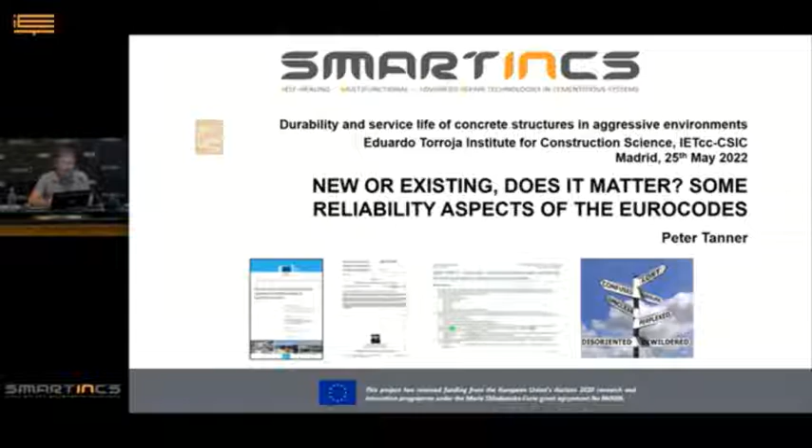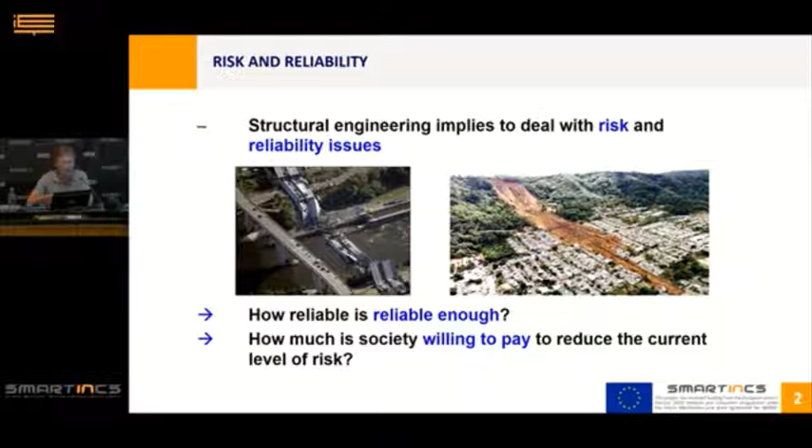In structural engineering, we always have to deal with risk and reliability issues. We do not want to produce this kind of situations, of course. And we have to answer questions like how reliable is reliable enough? How much is society willing to pay to reduce the current level of risk, etc.

Traditionally, structural engineering always has been a self-regulating field in the sense that codes and standards are produced by the engineering community. By definition, structures designed and built to code rules are considered safe and fit for use, as these two, hopefully, from our office.

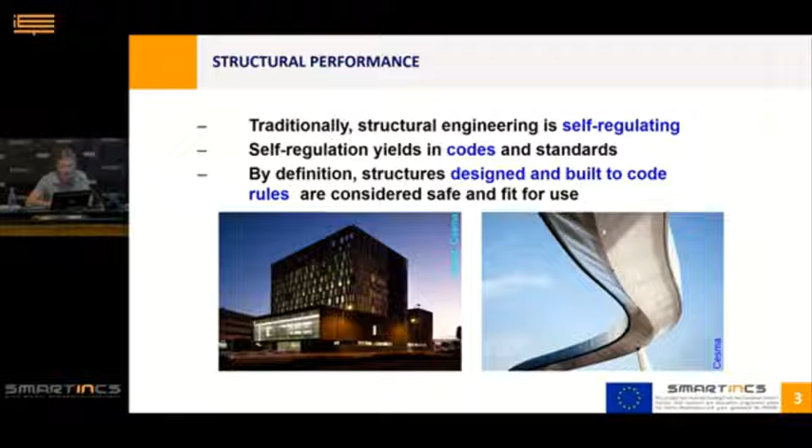Now, these codes treat the safety issues implicitly, so that risk acceptance mainly is based on past experience. And the requirements, in fact, may be insufficient, maybe they are adequate, or maybe they are too high, so that we waste available resources to reduce risks.

This picture is from a previous avian flu crisis 10 years ago, where everybody said that there was an overreaction, and maybe nowadays the requirements would be different. This also shows that the requirements may change over time.

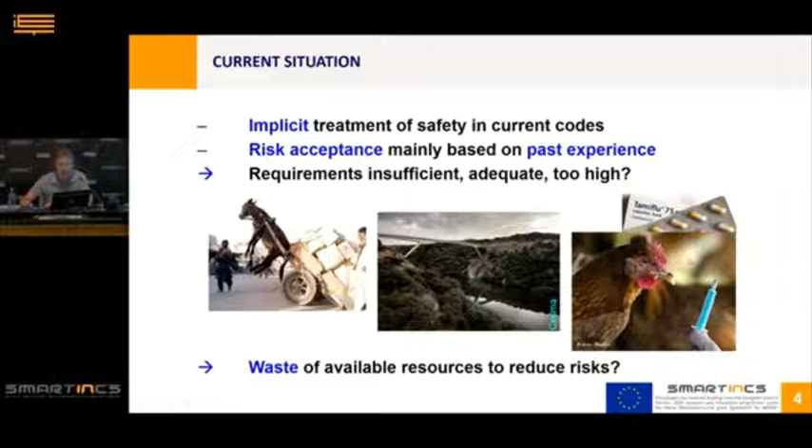If we now switch to existing structures, the need to assess the reliability of an existing structure may arise from different causes, but all of them can usually be traced back to doubts about reliability, as here, where we had to add a new roof to an existing grandstand, these typical frame structures, thus completely changing the internal forces and moments, or in this case, where we had to widen the bridge deck, thus increasing the traffic loads.

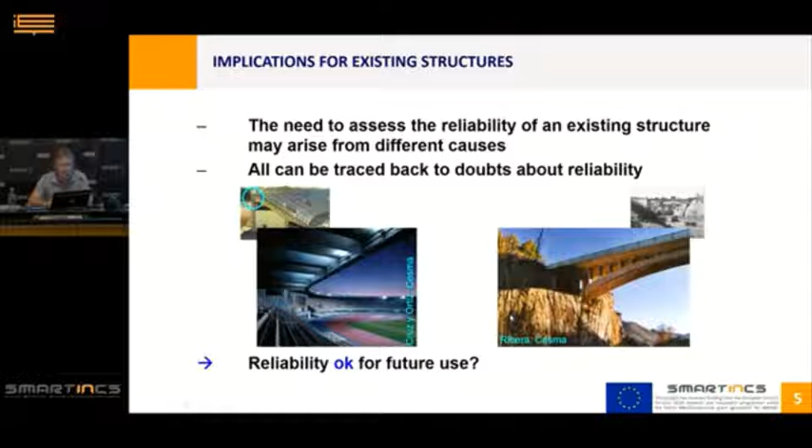We have to decide whether the reliability of these existing structures is sufficient for the future use conditions. So the fundamental problem is to find an answer to the question: is the structure reliable enough? In fact, there are only two possible answers, yes or no.

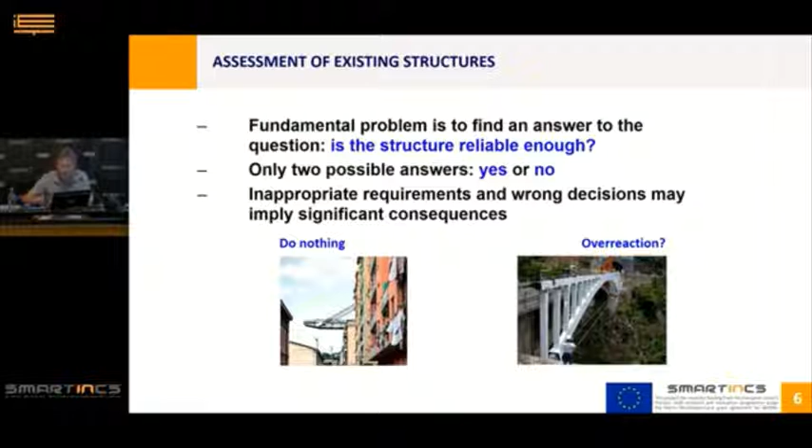But it is not as simple as that, because inappropriate requirements and wrong decisions may imply significant consequences, as well if we do nothing where we probably should do something, or if we overreact and thus waste public resources. So this is the context.

Let's now have a quick look at what we do as engineers. We take decisions under uncertainty. Then we will have a look at the main differences between assessment of existing structures and design of new structures. We will see how this topic is tackled in the Eurocodes, and we will also have a short look at needs for further development.

Many engineering problems can be described by comparing two quantities: the effects of an action on a system, like here, for example, this block, and the corresponding capacity of the system, the resistance in this case of this wire. The reliability of the system is expressed in terms of basic variables, R and E in this case, by the limit state function. The simplest limit state function is the one that compares R and E, and it is expected, of course, that R is bigger than E.

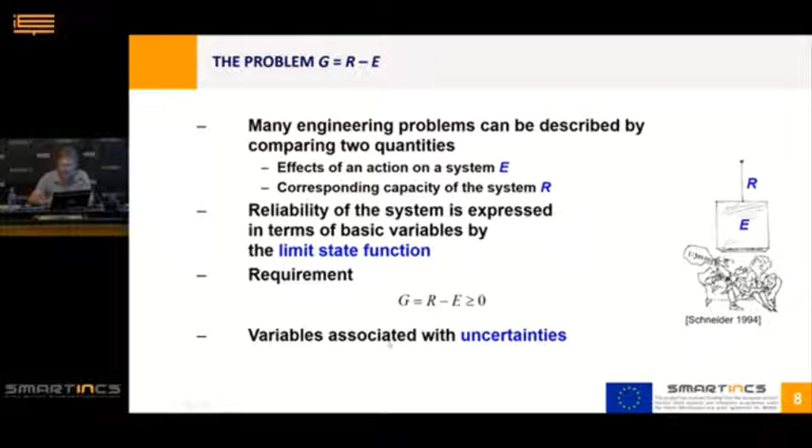Now, the problem is that the variables are associated with uncertainties. There are different types of uncertainties. First of all, the natural variability. Then statistical uncertainties due to limited data. We usually only have a few data available, particularly if we are talking about existing structures.

And there is, of course, also lack of knowledge, for example, about the future evolution of certain parameters: traffic loads, wind velocities, material strength, etc. And there is also lack of knowledge in models, because every model, even if it is a sophisticated 3D nonlinear finite element model, it is still a model. The outcome of our calculation is uncertain.

And then there is also human error, but we will not talk about that because this is supposed to be avoided by quality assurance procedures, etc. There are different possibilities to represent the uncertainties. Normally it is sufficient to represent the variables by their distribution function with a certain mean value and a certain scatter.

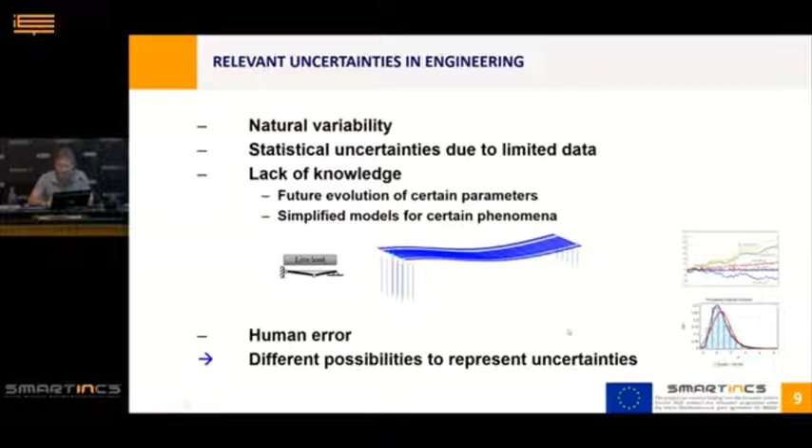On the other hand, the general principles of structural reliability are the same for design and assessment. So we may ask ourselves, why should there be a difference between assessment of existing structures and design of new structures if everything is the same? In both cases, we can verify structural reliability in terms of probabilities of failure, reliability indices, or using characteristic values and partial factors.

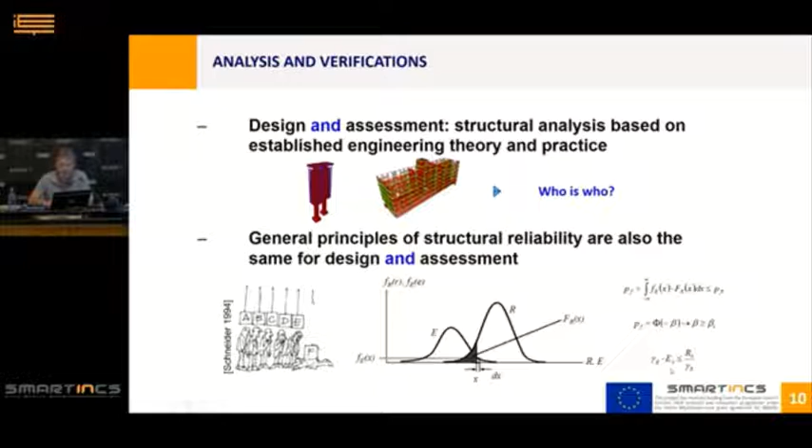Now let's see what the differences are between assessment and design. The fundamental difference is the state of information. If we design a new structure, we start with a blank sheet, and we have to assume the properties of the future structure. To do so, we have our codes, where the variables are defined. If we apply the codes correctly and the structure is properly executed according to the design, then the reliability will be more or less objective—the reliability associated with the code rules.

In existing structures, the situation is completely different. Very often we have only vague information available, or even no information, but the structure is there, so we can measure its properties and actions, etc. So the reliability will depend on the available data, and sometimes on the knowledge of the expert doing the assessment. The reliability of an existing structure is therefore more subjective than that of a new structure.

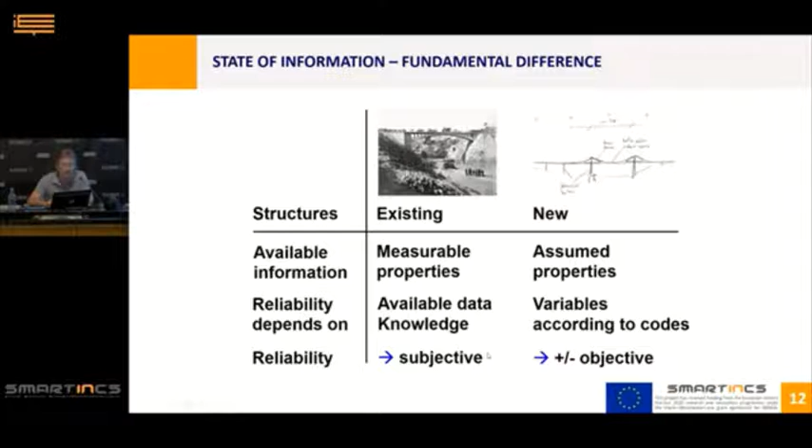Since the structure is there, we usually apply a staged evaluation procedure. We have our construction in a natural and human environment exposed to certain hazard scenarios. To analyze the reliability of the structure, in a first stage we would assume very conservative assumptions for the different variables. If with these conservative assumptions we are able to verify structural safety, serviceability, and also fatigue in case of bridges, for example, then we are fine and can use the structure also in the future.

Otherwise, we would improve the information and verify against safety, serviceability, etc. We can repeat this procedure as often as we want, but normally we would stop if there are no longer doubts about the reliability of the structure, or if there is no margin for improvement. Then we would take a decision: either to continue using the structure, or to strengthen or even substitute it.

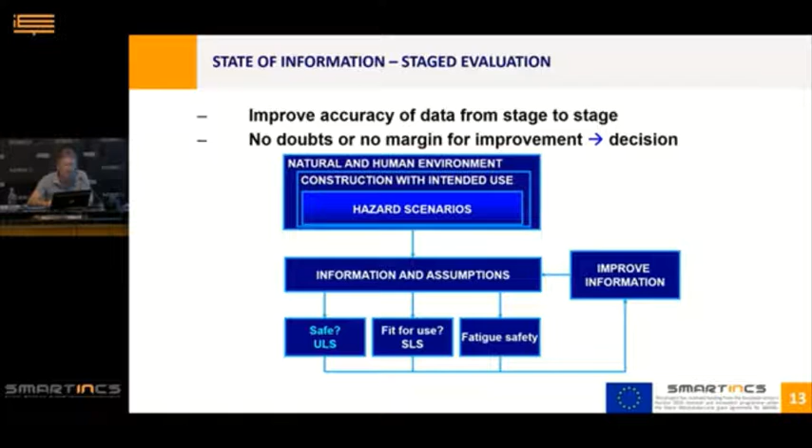There are different complementary approaches to updating. We can update the failure probabilities if we know some load effects—for example, if we carry out load tests, or if we have information on loads applied over the past service life. Then we can update the failure probabilities. But normally we would update the basic variables, using a prior distribution function reflecting all information available before data acquisition is carried out.

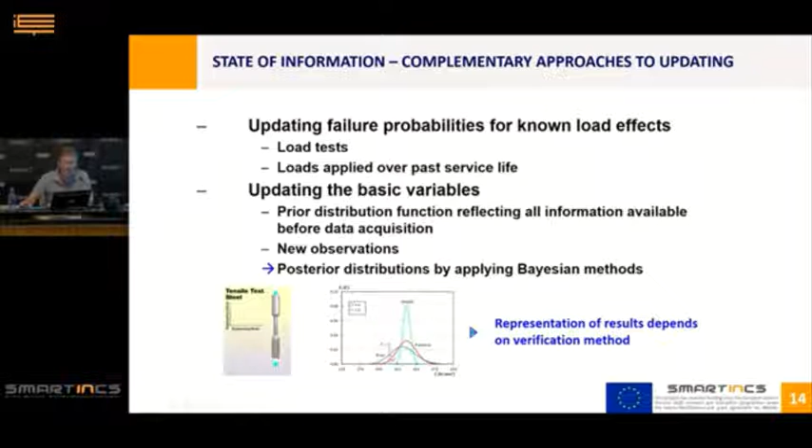Here, this blue curve, for example, represents the elastic limit of a steel. Then we have new observations, for example the results of a certain number of tests, which we combine with the prior information, obtaining a posterior distribution function by applying Bayesian methods or other statistical methods. The representation of the results depends on the verification method used: if we use probabilistic methods, we use the distribution function; if we use partial factor methods, we use the updated characteristic value—in this case, of the elastic limit of our steel.

Another difference between existing and new structures is deterioration. Any structure is exposed simultaneously to mechanical actions and environmental influences. In design of new structures, we often separate the requirements and checks for the ultimate and serviceability limit states, where we normally consider mechanical actions on one hand, and durability on the other, using condition or proxy limit state verifications.

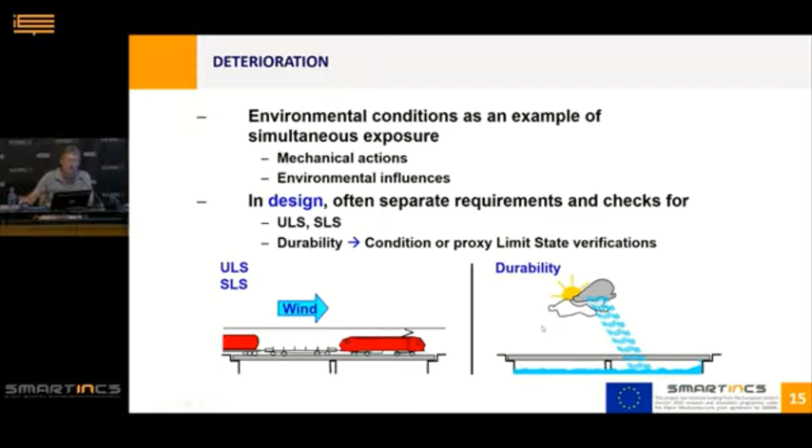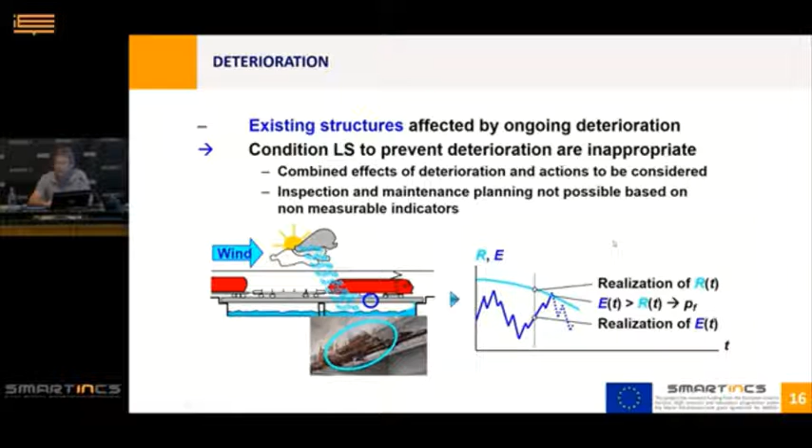This is not appropriate for existing structures, because deterioration may already be ongoing, so the resistance may decrease over time, and we have to take into account the combined effects of deterioration and actions when we carry out our verifications. This is also the case because inspection and maintenance planning is not possible based on non-measurable indicators or proxy limit state verifications. In case of ongoing deterioration, the assessment should be based on shorter reference periods.

The previous speaker was talking about this topic as well, whether the verification should be carried out for a lifetime or shorter reference periods. In existing structures, the reference period should be shorter, for example one year, and decisive would be the last year of the future service period.

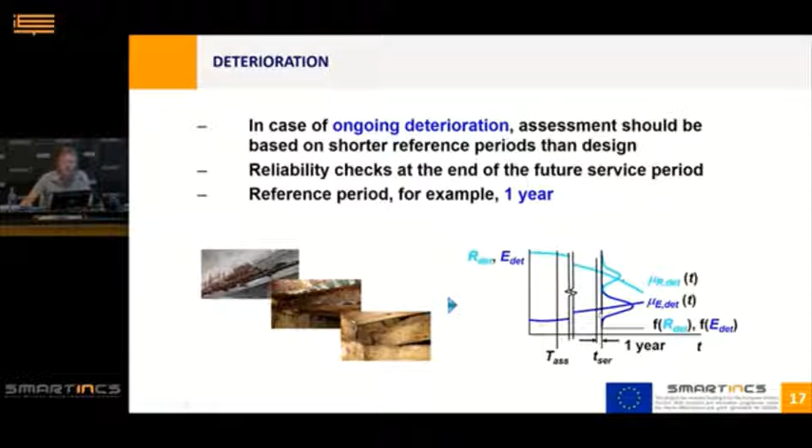Also, the reliability requirements may be different in existing and new structures. In general, reliability requirements depend on the cause and mode of reaching a limit state, the direct and indirect consequences of failure in case this should happen, and the relative cost of safety measures to increase reliability. It is much cheaper in new structures to add, for example, an additional rebar than in existing structures, and of course, as mentioned before, the reference period matters, so lower levels can be justified for existing structures because the cost of safety measures are higher there. Replacement of existing structures may imply interruption of activities or even resettlement of population, and reduction of resource consumption compared to replacement.

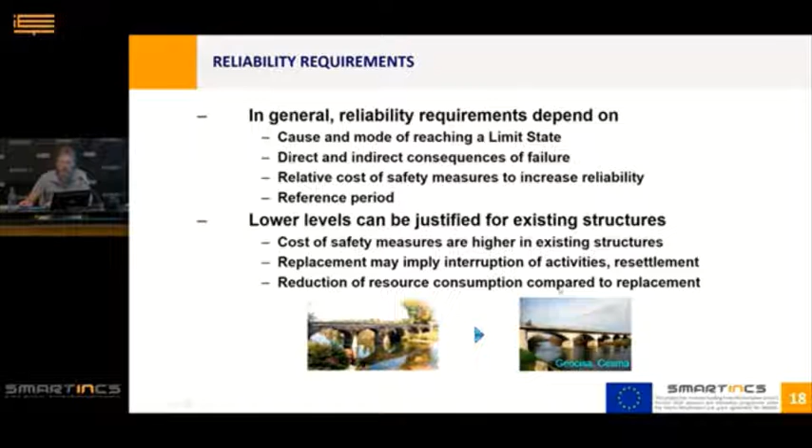Also, verifications may be different in design or assessment. If a structure exists, we can assess this system based on past performance. We can do that qualitatively, where no reliability background exists, so this is rather dangerous, and it is not allowed in all countries, but in some countries it is done. But we can also do a quantitative assessment based on past performance, where we take into account previous information about, as mentioned before, load tests or load effect histories, for example, and we can calculate conditional probabilities of failure, which we compare to some admissible value for these probabilities.

But the normal case would be to carry out the verifications based on updated variables, where we can use risk-based methods. We use updated variables to determine updated probabilities of failure, and if additionally we take into account the consequences of possible failures, we obtain the expected risk, which we can compare to some acceptable level of risk. Or we can also use reliability methods, where we do not directly take into account the possible consequences.

And the normal case would probably be to apply partial factor methods, as we do also in design. And partial factors for assessment may be fixed, or they may be adjusted depending on the scatter of the corresponding variables and also on their relative importance in the limit state function.

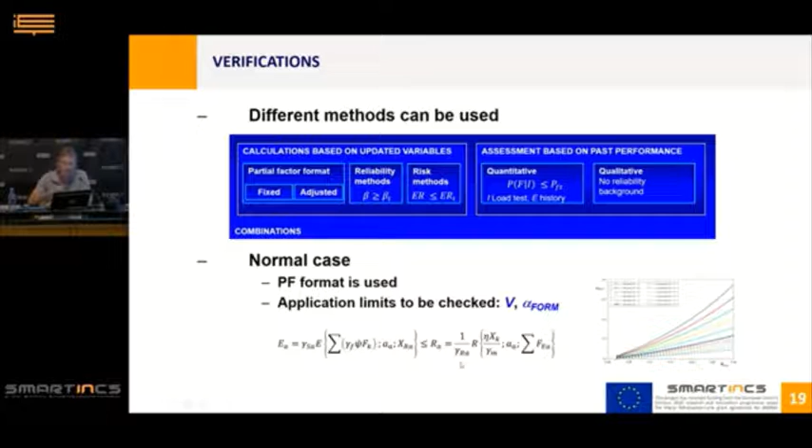Finally, also the results may be different. If we do a design, we start with our sketches, then we do our calculations, we do our drawings, and finally our bridges are built, etc. So we have a clear definition of the load-bearing system, of the different members, the details, and the materials.

In an assessment, the outcomes may be completely different. For example, the reliability may be sufficient for the remaining service life, then we are fine. Or it may be sufficient at the time when we perform our assessment, but not for the full remaining service life. Or it may even be insufficient at the time of the assessment, or our structure may be in such a bad state that immediate intervention is necessary.

And also for the intervention, we have many different options. We may have construction interventions, operation interventions, etc.

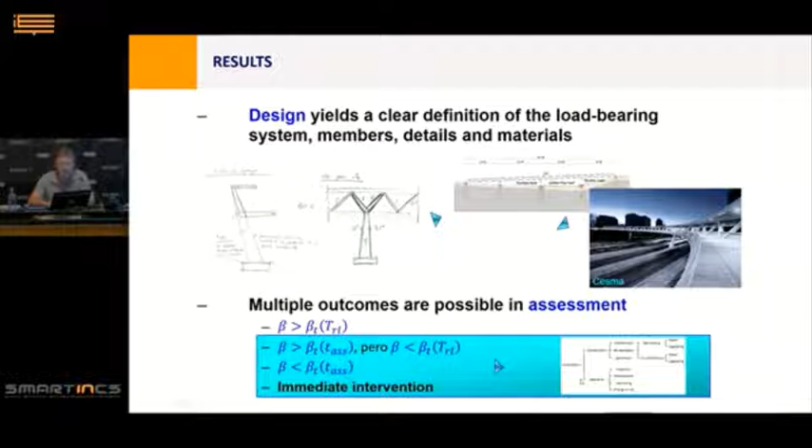So how is all this treated in the Eurocodes? As we have seen, the general principles of structural reliability established in Eurocode 0, EN 1990, are the same for design and assessment. But as we have seen, there are important differences. Due to these differences, if we apply design-oriented rules to the assessment, then the outcome would be conservative. And this might lead to economic, ecological, or also socio-political consequences.

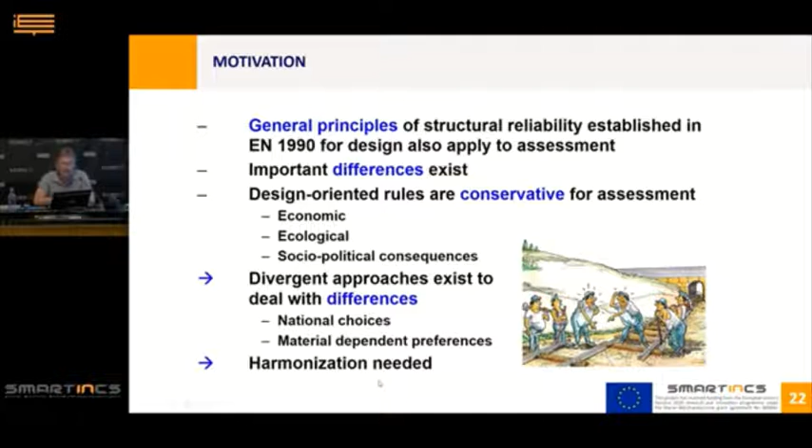In order to overcome these problems, there are different approaches. These approaches depend very much on national choices, but also on material-dependent preferences. Steel people and concrete people do not think in the same way, it seems, etc. So that harmonization certainly is needed. This has been recognized by the European Committee for Standardization, CEN, already 10 years ago.

So a working group was started, I think, in 2012 to produce, first of all, a science and policy report, which has been published in 2015 by the Joint Research Center. It contains the policy framework, and a summary of existing regulations in different countries and different standards, etc., and also a prospect for possible future CEN guidance on this topic.

Based on this report, a working group and a project team then established a draft for a technical specification, which was published in 2020. It complements Eurocode 0 for design, with general rules and also rules about actions for assessment of existing structures. In summary, all the differences that we have identified before are dealt with in this document on the staged assessment procedure when we are talking about assessment of existing structures, on the updating of information, on deterioration, different options for verifications, and different options for interventions. Of course, only from the point of view of the treatment of reliability problems.

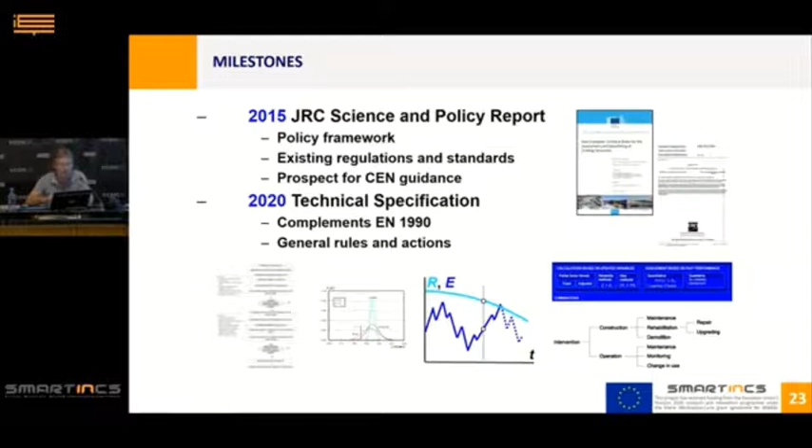After that, these technical specifications should be transformed into a future Eurocode. For this, another working group and project team drafted recommendations, a part of the future Eurocode to convert the technical specification into a Eurocode for general rules for assessment and actions, and also a report on requirements and guidance on development of material-specific provisions. It was decided that this draft Eurocode should be Part 2 of Eurocode 0, although this is not final and may change in the future.

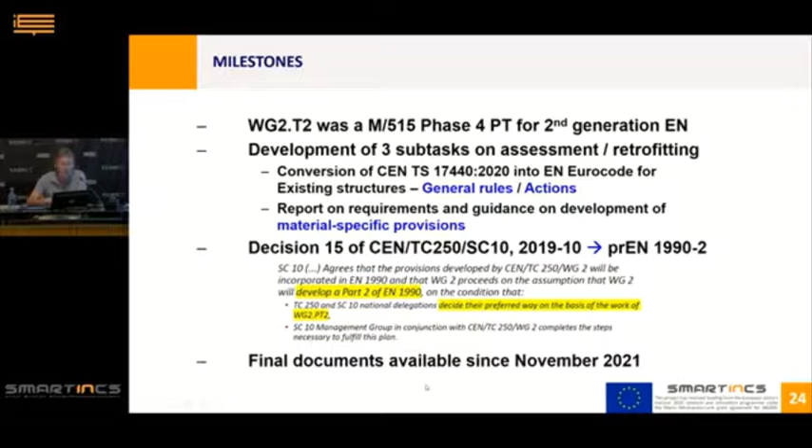However, the final documents are available since November of last year. The scope of the document is additional provisions to Eurocode 0 Part 1 for the design, but now for the assessment and retrofitting of existing structures. It contains provisions for using updated data for basic variables, structural models, and failure probabilities, and rules for the assessment of structures in case of retrofitting.

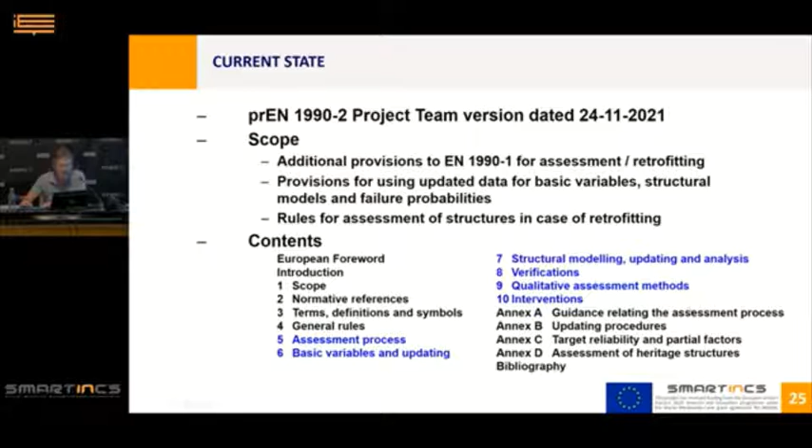Here we have the list of contents, but to recover a little bit of time, I will skip this one.

Also, the new Eurocode 2 for concrete structures contains an annex on the assessment of existing structures, with additional rules for aspects not covered in the design part, on previous old materials, on detailing, which was different in former times. Anchorage of plain bars is also a hot topic there.

It also contains generic considerations for deterioration. In case of deterioration, according to this code, assessment should consider all relevant influences like reduced concrete sections, reduced area and ductility of reinforcement, stress concentration due to corrosion and stress corrosion, reduced concrete-steel bond, loss of mechanical properties of concrete, cracking or expansion of concrete, etc. But there are no prediction rules for deterioration rates.

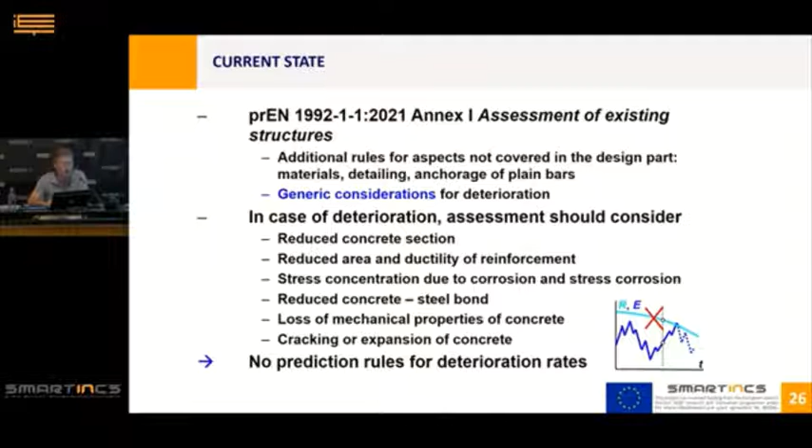And finally, I have no slide for that, but Eurocode 8 for seismic design also contains a specific part for seismic assessment of existing structures. This is not new because this part already existed in the first generation of the Eurocodes, although it is now completely revised.

Let's now see some needs for further development. Sorry, I have to drink a little bit because I have a flu, it's not COVID.

First of all, the reliability requirements. We have seen before that the requirements can be different for assessment of existing structures from those used for new structures. And we have also seen that the reference period preferably should be 1 year and not the lifetime.

In Eurocode 0 Part 1, we actually have indicative values for these requirements for 1 year, depending on the consequence class, and for a 50-year reference period. They should, in fact, be equivalent, leading to the same solution if we apply the corresponding requirements properly.

But if we look closer at these values, indicated in terms of reliability indices rather than probabilities of failure, although this is equivalent, we see that these equivalencies correspond to a ratio of the probability of failure for 50 years divided by the probability of failure for 1 year of 50. This means no correlation is taken into account, but in fact correlation exists, because in subsequent years, for example, the self-weight will be the same, and if we have no deterioration, the resistance of our structure will be the same. So there is some correlation.

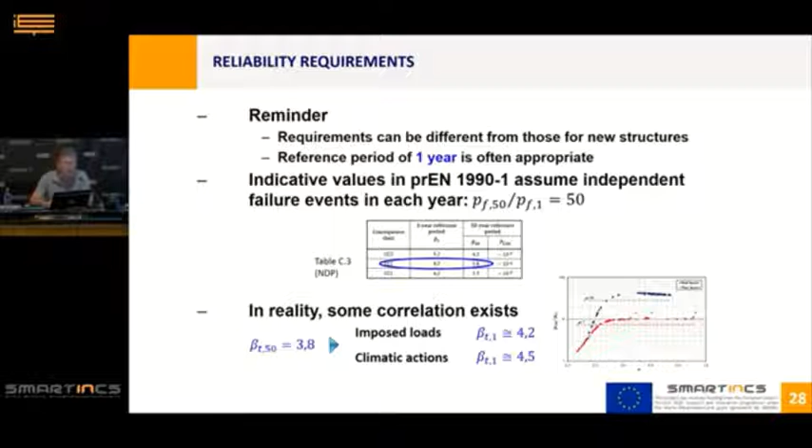And finally, we may also take into account heritage values. Furthermore, indicative values should also be established for serviceability limit states, not only for ultimate limit states.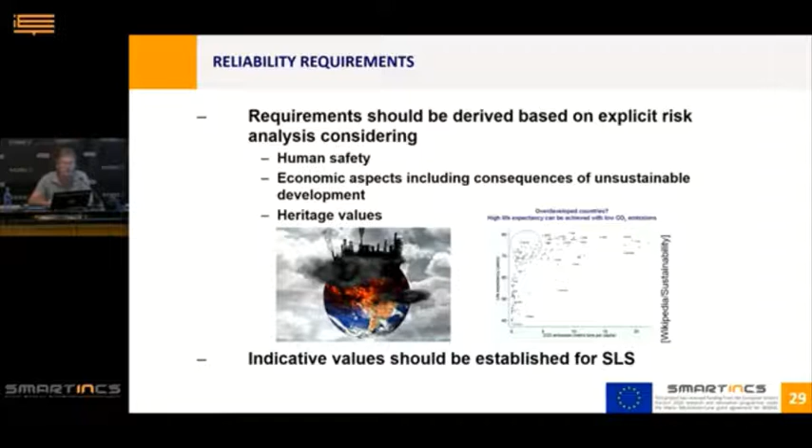Structural resistance, there are also many things to do. Just as a reminder, we have seen that existing structures may be affected by ongoing deterioration, leading to a decrease in resistance, so that design resistance models may be inappropriate for assessment. We cannot directly use them sometimes. There may also be other reasons why we cannot use design resistance models directly for assessment, so that we need assessment-specific provisions in the material-oriented Eurocodes.

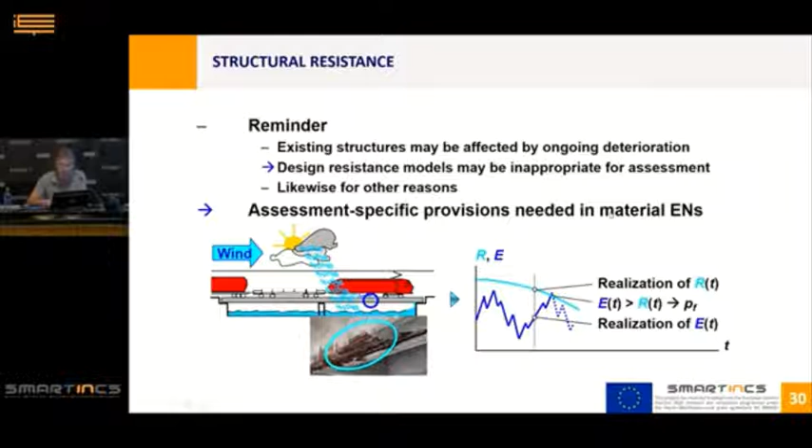Such models should explicitly account for the effects of deterioration on the resistance. They should be generally applicable for design and assessment. That would be the ideal case, but we may also adjust design models for assessment, or we can elaborate new models for assessment where we could take into account the effects of deterioration. And finally, we also need models that describe the propagation of deterioration in order to make previsions of the performance of our structures at the end of the future service life.

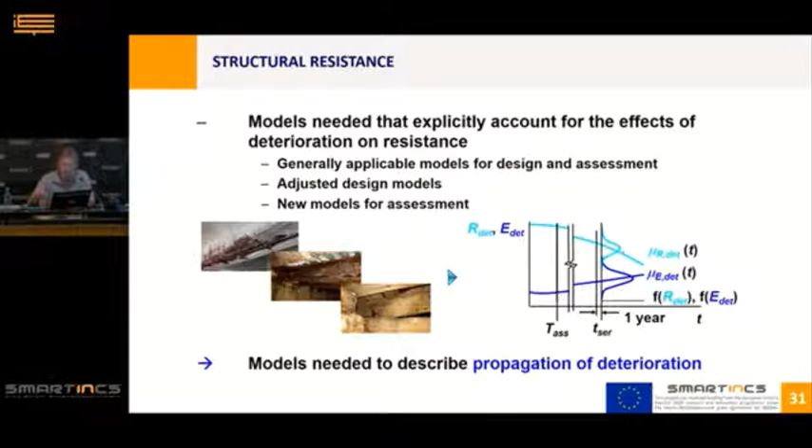What is important is that these models should be based on mechanical principles. It should not be statistical models. This is important. So for example for corrosion, you're all experts, the main effects of reinforcement corrosion should be taken into account: the decrease of bar cross-section, the stress concentration due to uneven corrosion as we can see here, the decrease of ductility of steel if relevant, strains due to the expansion of corrosion products, influencing the translation of material strength which we establish using these normal standardized specimens.

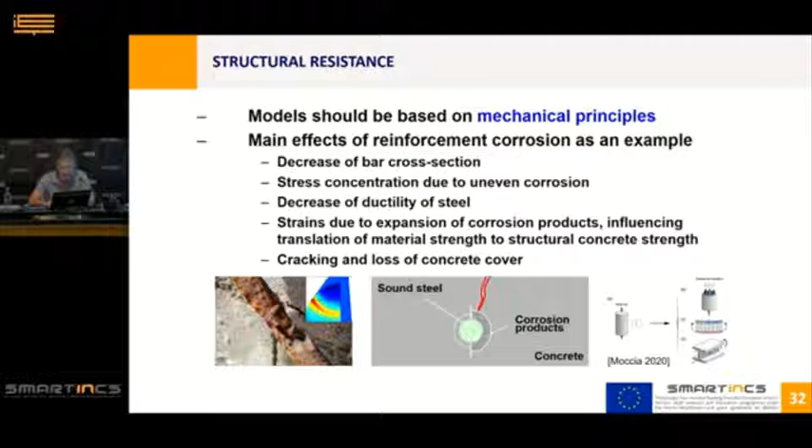But what we actually need is the resistance of the concrete within the structure, and this we must take into account, and also of course the cracking and the loss of concrete cover. All these kinds of mechanisms should be introduced in mechanical models to establish the resistance of deteriorating structures.

Then we come to the uncertainties. We have seen that the reliability requirements are linked to the uncertainties associated with the standardized rules, so that the assessment should be based on actual conditions of the structure we are analyzing. To this, we update information, as we have seen. This leads to a change in the uncertainties associated with the variables, so that we need probabilistic models associated with the code rules, which can be used as the starting point when we do updating.

So we need to know what is behind our code rules for all the variables. We have some information on that because currently there is a report being produced with the background of the reliability aspects in the Eurocodes. It should be published also as a JRC report very soon. But many parameters also depend on national circumstances, of course, if we think about climatic actions, etc. So there is a lot to do, at least in some countries. In others, this has already been done, and we have probabilistic information associated with the action variables.

Similarly, on the resistance side, also in this future background report, we have information, but further information is needed and should be given in the material-oriented Eurocodes. And also here, we have many national parameters, because in the past, in many countries, the construction procedures and preferences were different, of course. So there is still a lot to do in this field.

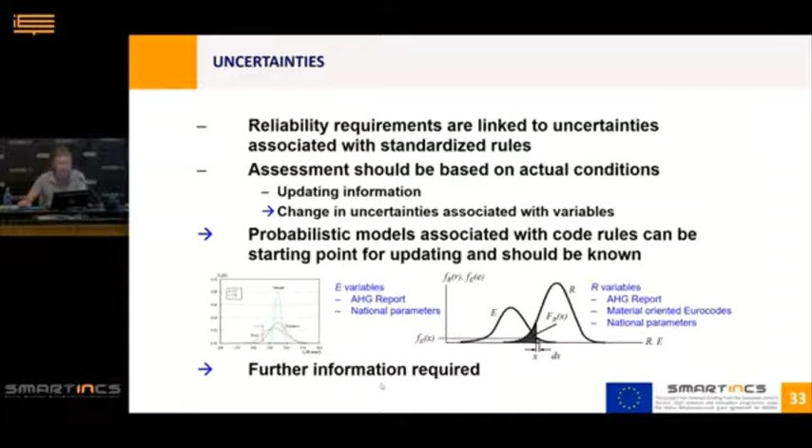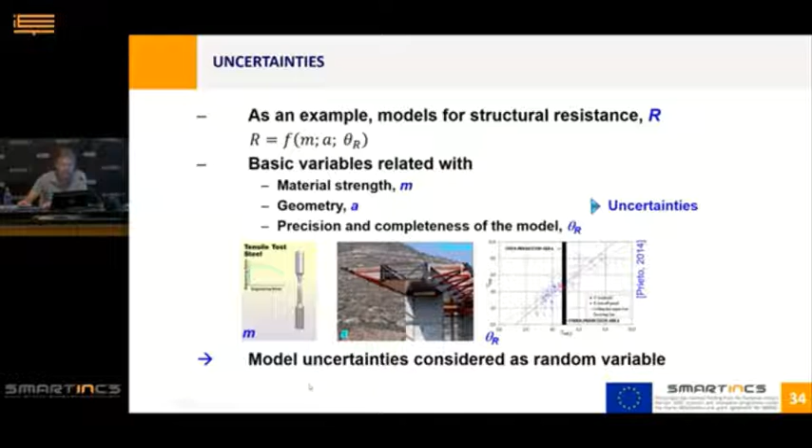If we look at resistance models as an example, resistance models, or the resistance of a structure, depends normally on some material parameter, on some geometric parameters, and also on the precision and the completeness of the models. Model uncertainties are considered in this context as random variables.

Now, if we think about existing structures, updating of material strength and geometry is more or less straightforward. Of course it is not always easy, but it can be done. But what is difficult actually in practice is the updating of model uncertainties.

But if we do updating, for example of material parameters, we need to know what is behind the partial factor we use for the design. Otherwise, when we do the updating, we may come to equivocal conclusions. So we need to know the parameters behind the partial factor accounting for the model uncertainties.

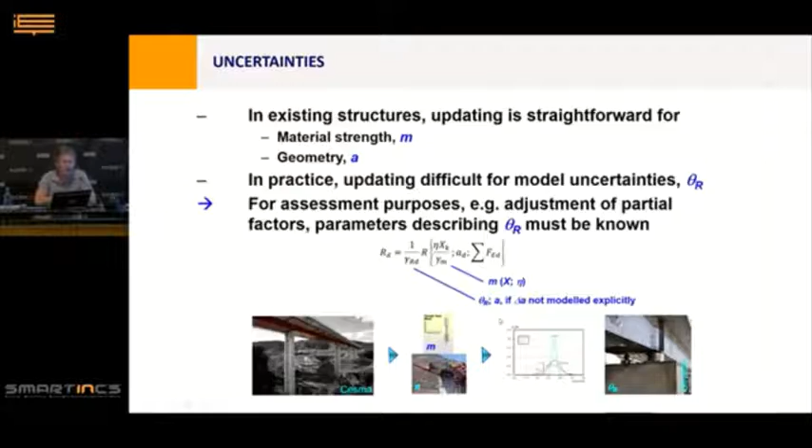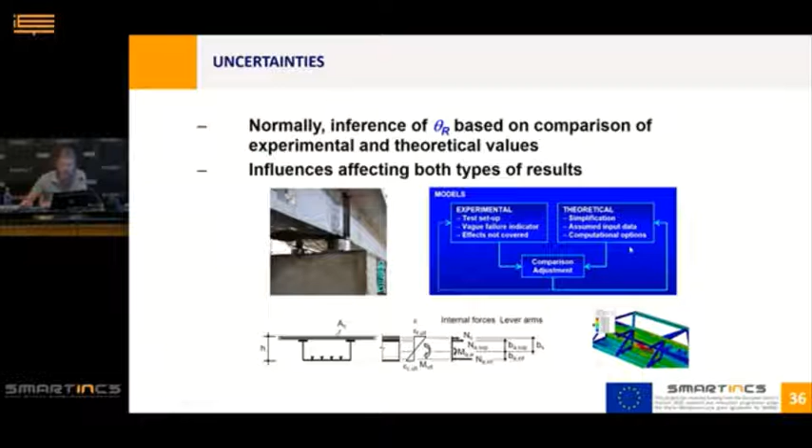Now, normally, model uncertainties are inferred based on a comparison of experimental results, like here, and some theoretical values. Of course, for theoretical models, we can use very simple models, we can use nonlinear finite elements, we can use many things. And there are many influences affecting both types of results, the experimental results on one side and the theoretical results on the other. What we then do normally is compare both, and if the results do not match, we normally adjust our theoretical models. But maybe sometimes we should also adjust our experiments because of course there may also be some errors or uncertainties in it. So based on this kind of comparison, we usually deduce or infer our model uncertainties.

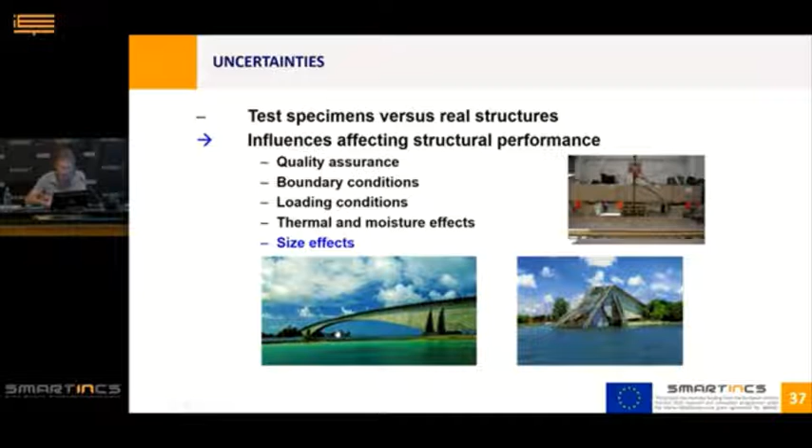However, in reality, things are a little bit more complicated. Test specimens are normally of limited size, what we can do in a lab, and the outcome of such tests or of the corresponding models we then use to design this kind of structures. And of course there may be some kind of size effects. Also, the quality assurance or boundary conditions, loading conditions, thermal and moisture effects may be completely different in the lab and in reality. So what we actually would need is a comparison of the structural performance of real structures and what we obtain from our experimental and theoretical models.

But of course, this kind of information usually is not available if we are talking about failure. Normally it comes from a comparison of theoretical and experimental results. But what we would need is this here.

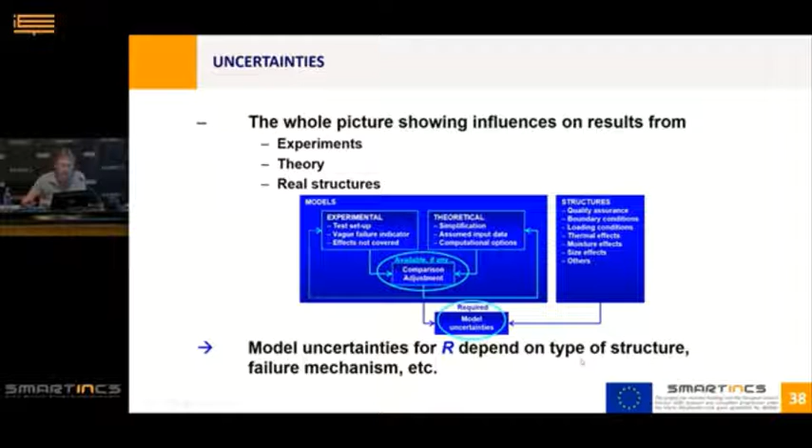The model uncertainties for resistance depend on the type of structure and on the failure mechanism. This is the reason why the material-oriented Eurocode should contain the numerical values of the partial factors covering the model uncertainties. This is normally hidden somewhere and we do not know it.

They should also define the uncertainties covered by these numerical values, and define the statistical properties of the variables describing these uncertainties. All this information should be provided for the models for the design of new structures, if they exist for adjusted models to enable assessment, or if we have new models to enable assessment. The corresponding uncertainties should also be described, and in the same way, for the models for structural resistance after strengthening or rehabilitation, etc.

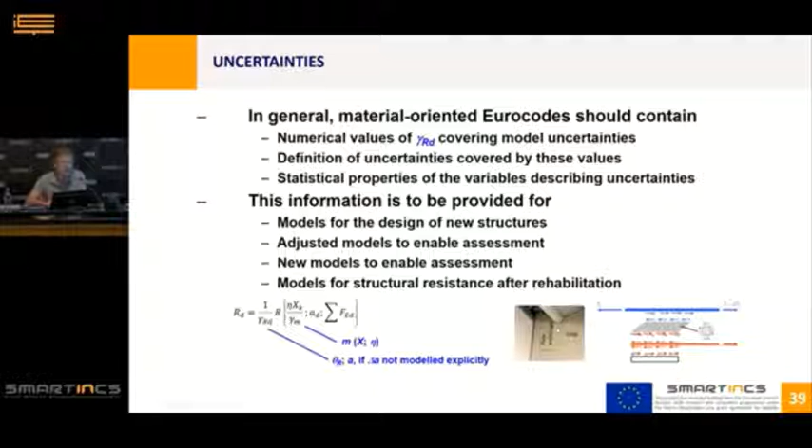Also here, there is a lot to do still. Also in the field of robustness, there is certainly a need of further information or research. Redistributions due to local failure may lead to successive collapse of other components, a domino effect, we can say. This is a picture from a recent failure in Miami, one year ago, I think.

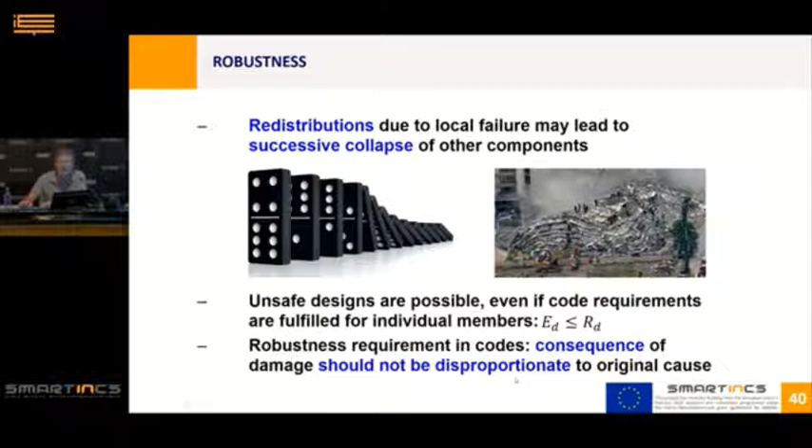So unsafe designs are possible even if code requirements are fulfilled for all individual members. This is the reason why most codes include some robustness requirements, in the sense that the consequence of damage should not be disproportionate to the original cause. Now, such generic robustness requirements are mostly not further developed. There are no operational rules, or not sufficient operational rules.

This is related, in my view, to the absence of a practical metric for robustness quantification. Robustness is difficult to quantify, and of course it is related to the complexity of the problem at hand.

In this context, conceptual design is most important. When we talk about conceptual design, we are talking about the choice of the type, layout, and main dimensions of a system, of the individual members, of the details, and also the selection of the construction materials.

The conceptual design should also include the identification of members influencing the system reliability or stability. Not all members are equally important. And it should include the choice of a resistance mechanism after failure of those members.

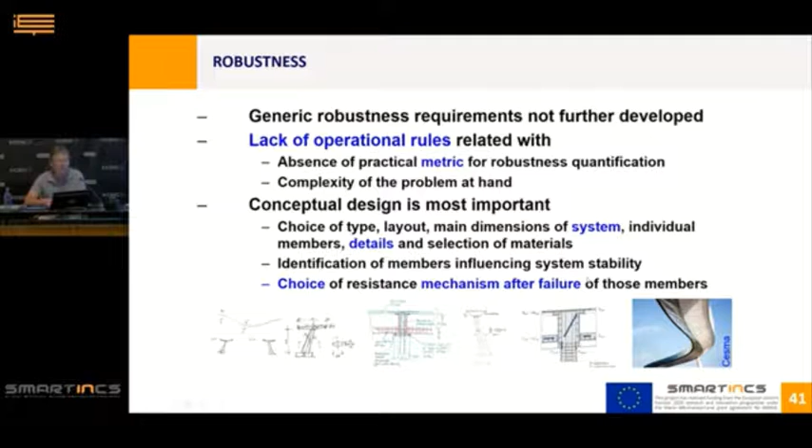They are called key members. This can be done, of course, for new structures. But we should be aware that any conceptual solution for increased robustness may worsen the performance for other hazard scenarios, and that is the difficulty associated with robustness.

If we now switch to existing structures, conceptual changes are very difficult or even impossible, at least if we do not want to proceed to any constructional intervention. Therefore, what is most important is the unequivocal identification of all relevant hazard scenarios, particularly in existing structures.

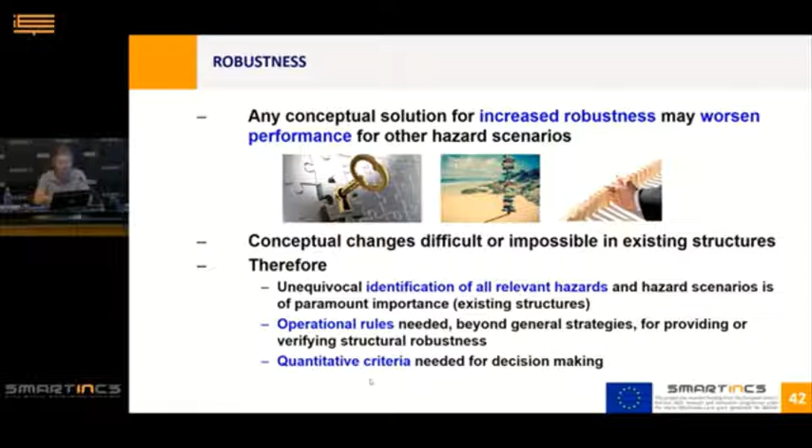But we also need operational rules beyond general strategies for providing or verifying structural robustness. For this, we need some quantitative criteria for decision making. What we have proposed for the draft of the future model code, the 2020 Model Code of FIB, is the introduction of different reliability requirements for normal situations and normal members.

We have the normal code requirements for reliability. For key members, which are those decisive for system strength and stability, and for identified situations, we would use the maximum value out of the normal code value, the 3.8 value for consequence class 2 and 50-year reference period, as we have seen before, and on the other hand, a requirement for human safety.

Then for the remaining system, after possible key member failure, we would need a conditional reliability requirement, because we want to avoid the collapse of the remaining system, at least as long as we need to, for example, evacuate the whole building or whatever structure we are analyzing.

We have inferred such reliability requirements for human safety. I will not bother you with details about how we did that.

But what we have obtained is different reliability requirements. Here on the vertical axis, we have the reliability requirement, the reliability index for a 1-year reference period, depending on the collapse area and depending on the consequence class - consequence class 1, 2, and 3 - as defined, for example, in the Eurocodes. And we distinguish between design and assessment.

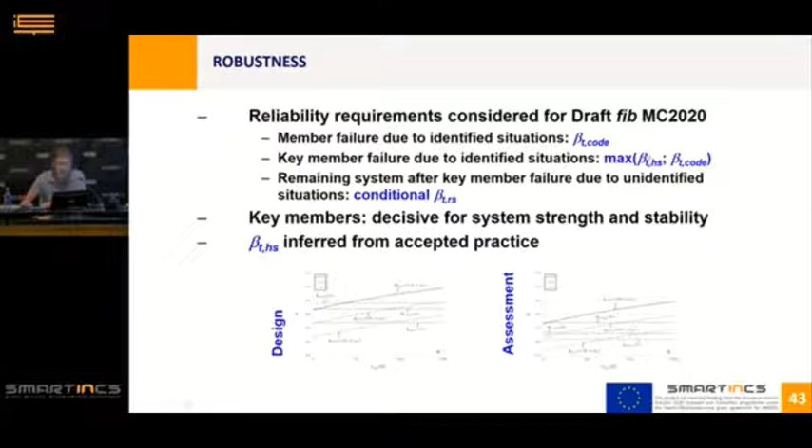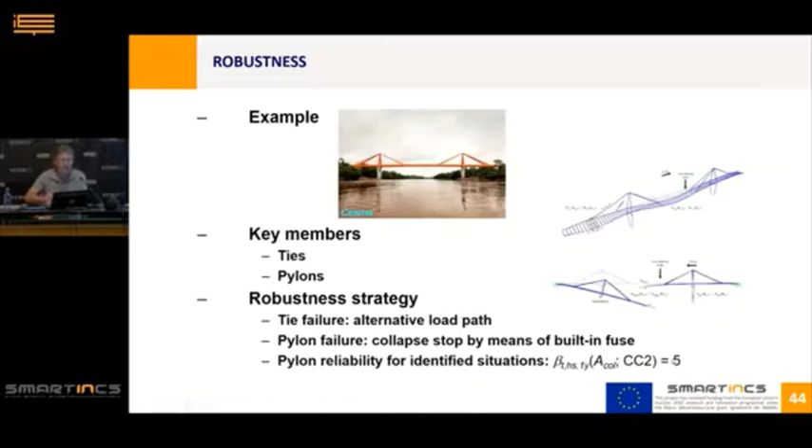Another field where we can improve things is monitoring. As it is well known, different causes may lead to non-compliance of any particular requirement. There may be deviations from the expected actions, for example, and there may be deviations from the expected resistance for

many reasons, so that we can quantify parameters related to such influences, and this quantification may provide evidence about the degree of compliance with the corresponding requirement. This is the reason why we are talking about indicators, reliability indicators, in analogy to what is done in other fields like economy, medicine, etc. Now, what is the best choice of the parameters to be quantified?

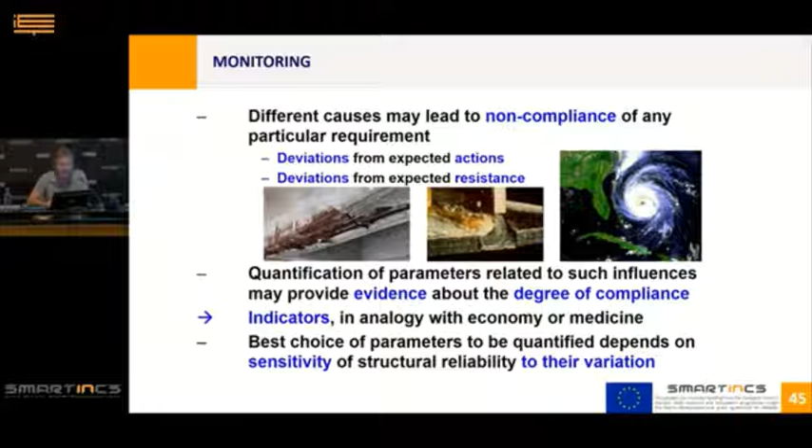The best choice will depend on the sensitivity of structural reliability to their variation. If there is no variation of the reliability, there is not much sense to measure the corresponding parameter. And this we should take into account when we define a monitoring program for an existing structure.

If we do that, for example, in this case, we can decide to measure the strains here in the hogging bending area where the bottom flange is under compression. Now, measuring things is okay, but it is not sufficient.

So we also have to establish threshold values, and this we can do by structural analysis, as we do also when we design a structure. By structural analysis, we can determine the admissible or threshold values and also the admissible average outcrossing frequencies.

If we have that, for example, for this bottom flange here, the more it is compressed, the worse is the situation. For example, here we have the threshold which can be outcrossed, let's say 90% of the time. Then we have a threshold which can be outcrossed once a week also here when we are talking about safety, or once per year.

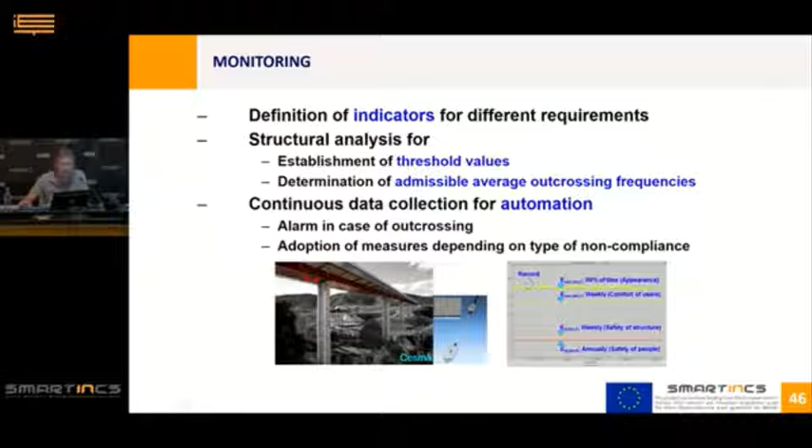These threshold values can then be compared with the measured values, and if there is too frequent outcrossing, of course, an alarm would be activated and we can adopt the corresponding measures.

So that monitoring is a very rational tool for risk control. It contributes to the optimization of operation costs for structures, new or existing. But guidelines are certainly needed for the choice of monitoring strategies and also for the analysis of data.

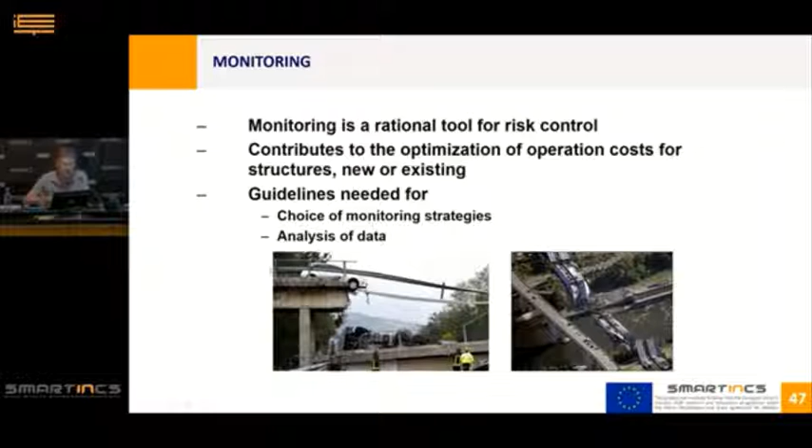So I come to the end. I hope that I respected the available time.

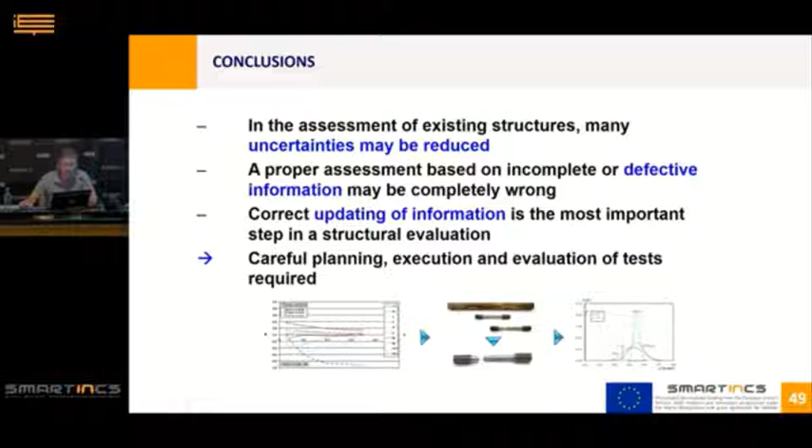In the assessment of existing structures, many uncertainties may be reduced. A proper assessment based on incomplete or defective information may be completely wrong, so that the correct updating of information is certainly the most important step in a structural assessment. And careful planning, execution, and evaluation of tests is really the most important thing.

Probabilistic methods are most accurate to take into account site-specific data, but such methods are not fit for use in normal daily practice. They are normally only used in very special cases.

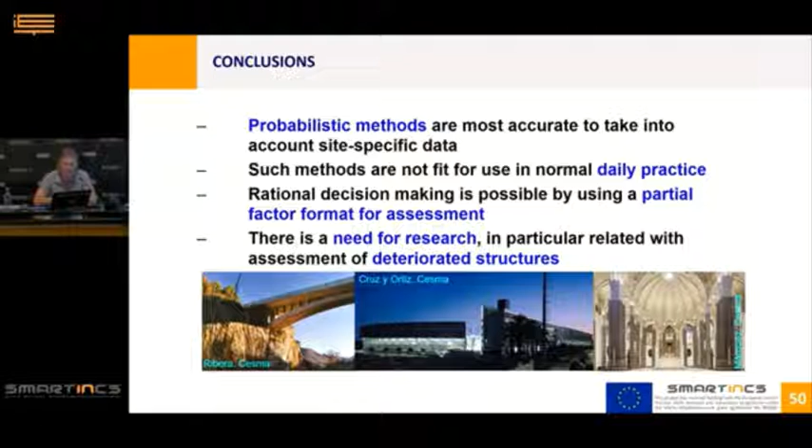Therefore, rational decision-making should be possible, and it is possible by using partial factor format for assessment, but there is a need for research, in particular also in relation with the assessment of deteriorated structures. So thank you very much for your attention.